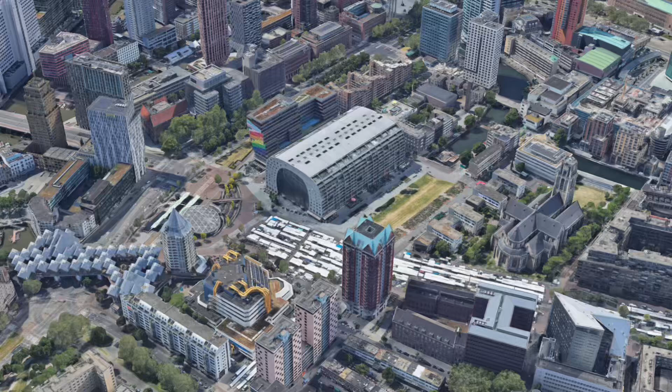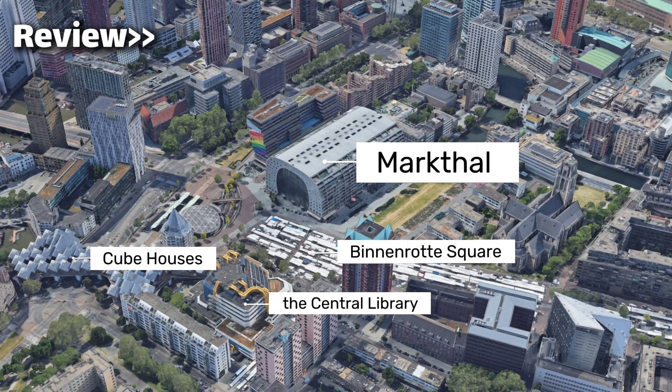The Markthal stands at the heart of Rotterdam, surrounded by major city landmarks such as the iconic Cube Houses, the Central Library, and Binnenrotte Square, and enjoys direct access to the city's transport network via the adjacent Blaak station.

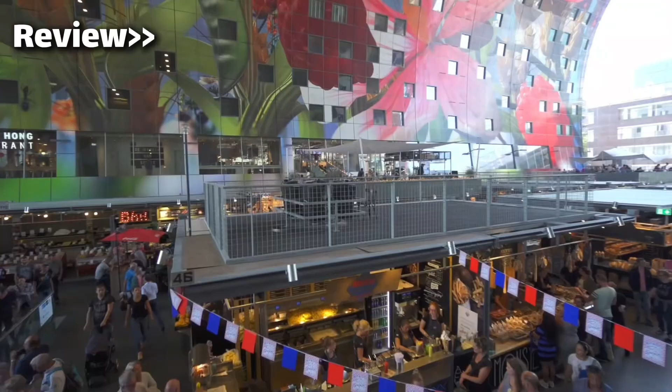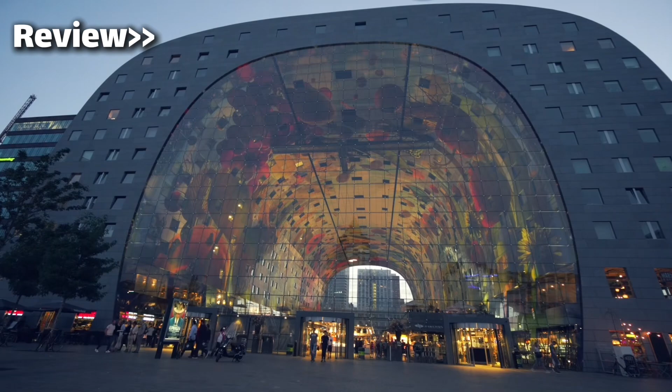As a pioneering model of urban multifunctionality, the Markthal uniquely binds a vibrant food market, diverse restaurants, retail spaces, and cultural venues with 228 apartments, including 24 luxurious penthouses, all housed beneath a dramatic horseshoe-shaped arch.

Conceived by MVRDV atop a historically layered site, the building vertically integrates its extensive commercial areas, cultural amenities, and residential units to create a lively, cohesive hub. 4 basement levels offer parking for 1,200 vehicles. The ground and first floors support over 100 food stalls and restaurants, and the soaring arch above houses apartments with

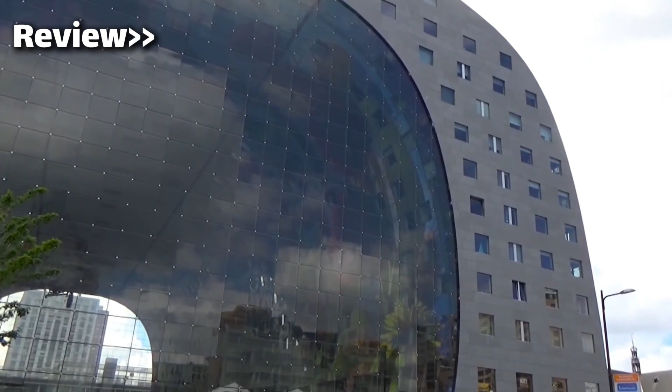striking city views. This intricate layering is made possible through cutting-edge structural innovation, notably the continuous concrete arch and record-setting cable-net glass facades, enabling natural light and panoramic connections across the diverse internal functions. Markthal is thus an exemplary case of vertical city living, where housing, commerce, leisure, and culture are interwoven within a

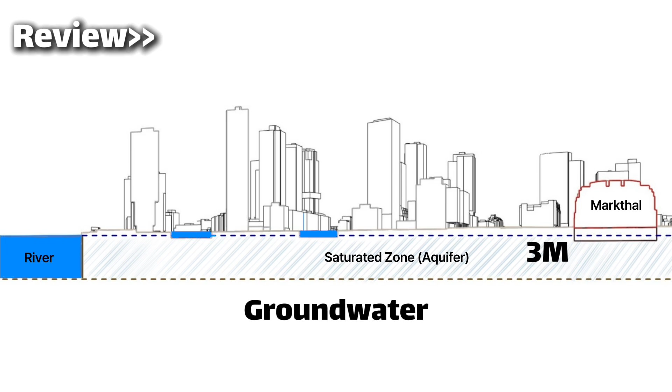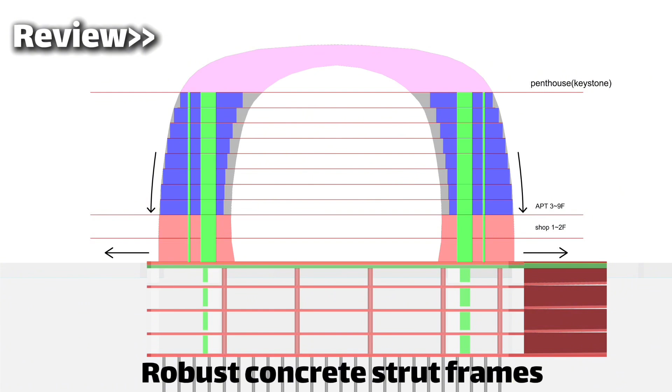single, dynamic structure. Built on historically reclaimed land with groundwater just 3 meters below the surface, the construction of the Markthal presented significant geotechnical challenges. Instead of relying on deep anchors, which would have been both risky and complex given the unstable subsoil and high groundwater, the project team employed robust concrete strut frames as internal bracing. These struts stabilized the excavation by resisting lateral earth pressures and maintaining the integrity of the construction pit.

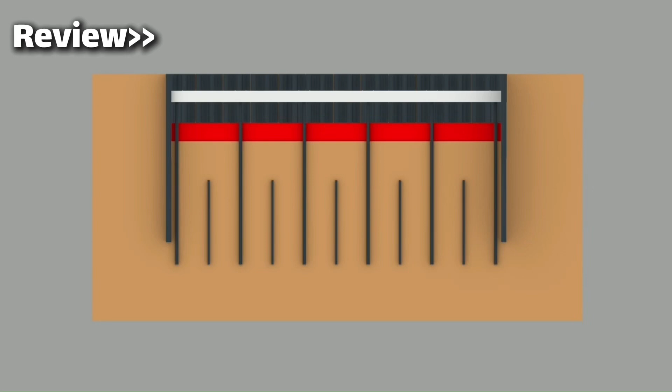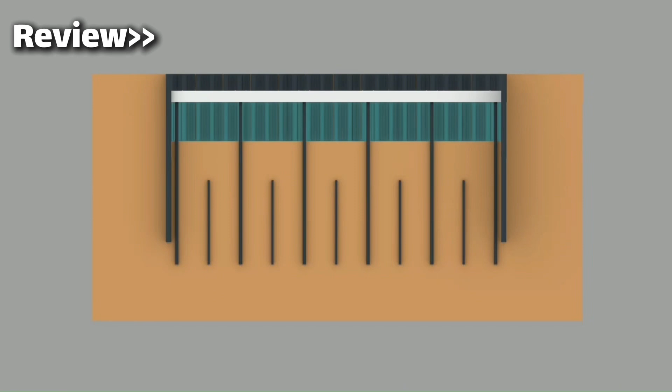To further counteract hydrostatic pressure and prevent potential hazards, the site was intentionally flooded. By filling the pit with water, engineers created inward hydraulic pressure that balanced the external forces exerted by the groundwater. After managing the groundwater pressure, the team constructed a massive 1.5 meter thick underwater concrete base slab. This slab provided a stable and watertight foundation upon which the rest of the structure could be safely built.

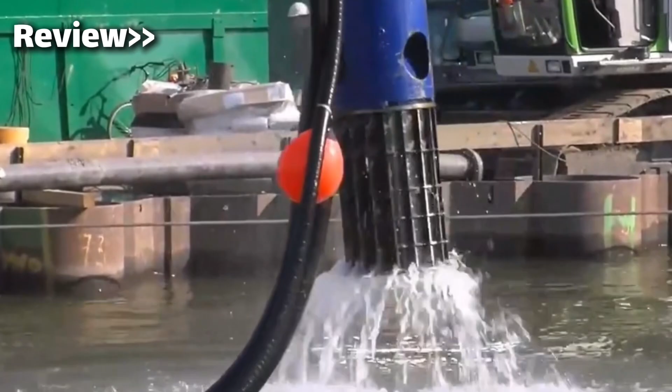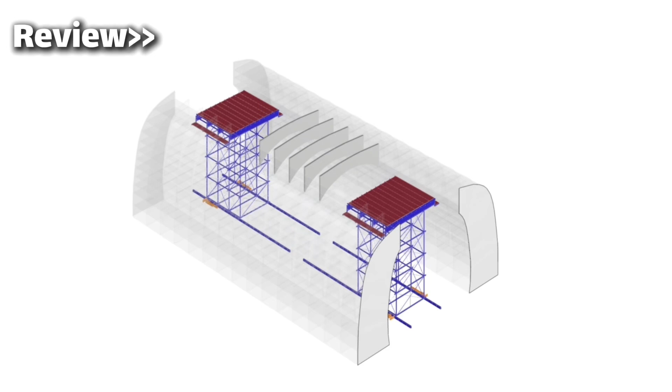After this foundation was secure, workers began the gradual process of dewatering the pit, at a rate of about 3 centimeters per hour. With the groundwork firmly established, we now move forward to explore the architectural and engineering feats that shape the Markthal's distinctive arch, particularly the construction of the soaring arch roof. This phase demanded the use of tunnel formwork, temporary mobile shuttering, and meticulous sequencing to accommodate the curving apartments and communal spaces embedded within the arch.

Enhancing the vast interior, the Horn of Plenty artwork animates the 11,000 square meter ceiling, exemplifying the seamless fusion of engineering precision and artistic ambition that defines the Markthal.

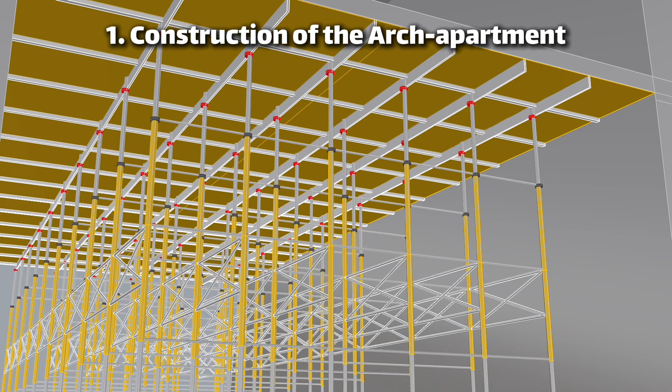The first and second floors of the Markthal were constructed using the traditional reinforced concrete method. Shoring props were used to support the wide column spans and temporarily carry the loads of the freshly poured concrete slabs. At this stage, cable frames were also installed in preparation for the glass facade. These frames provide both structural support for the future cable net facade and contribute to the building's overall stability.

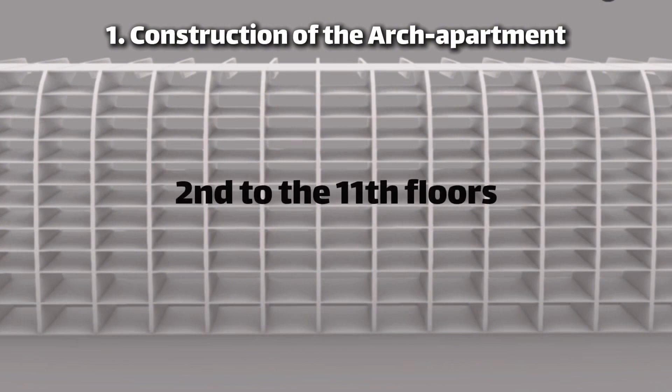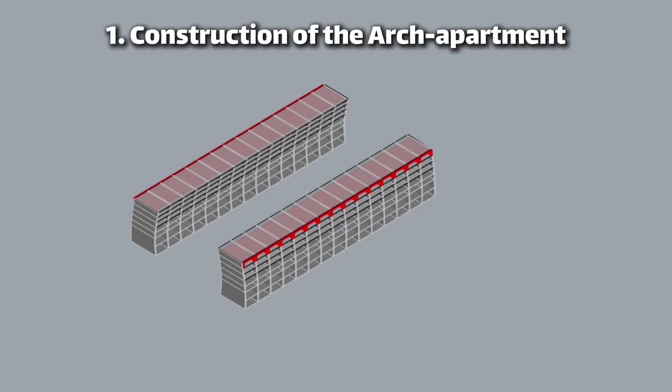From the 2nd to the 11th floors, the residential arches of the Markthal were built using the tunnel formwork method. Unlike conventional reinforced concrete construction, tunnel formwork enables the simultaneous casting of both walls and slabs. This method was ideal for the repetitive, arched residential units. The all-in-one process improves the uniformity and quality of construction while significantly increasing speed. Additionally, tunnel formwork yields high structural stiffness and reduces curing time compared to traditional methods.

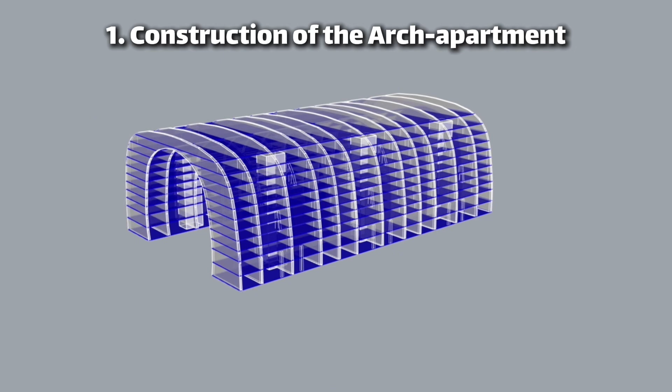Structural cores and tunnel formwork walls play a primary role in both vertical load bearing and lateral load resistance. The core structures and tunnel-formed walls collectively transfer gravitational loads to the foundation. The slabs, created with the tunnel formwork method, provide horizontal stiffness, enhancing the building's overall stability.

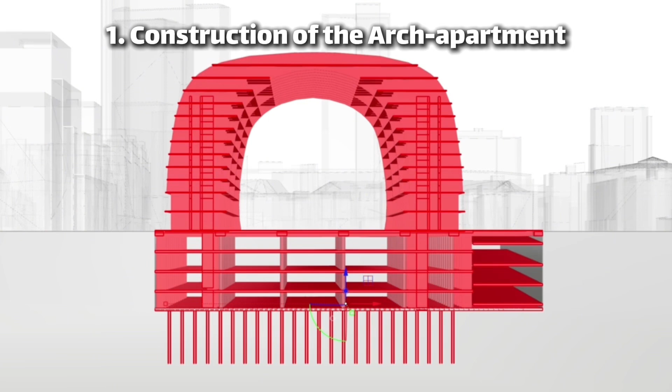In this system, the tunnel-shaped walls act similarly to shear walls, but with greater continuity, which means that the structure responds effectively to horizontal loads, such as wind and seismic forces, without the need for many additional, separate shear walls. The high rigidity and inherent torsional resistance of the tunnel formwork system allow the building to resist lateral forces efficiently and as a unified whole.

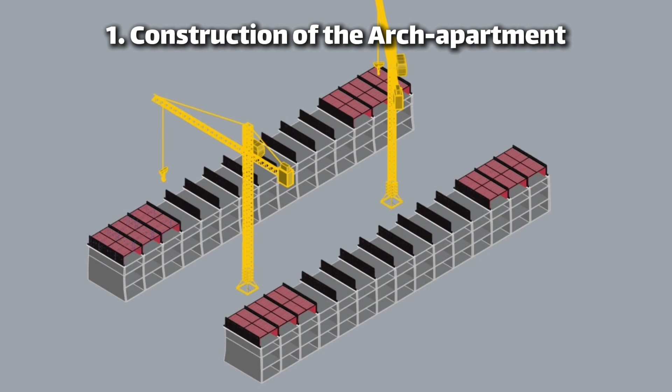The construction began with the establishment of precise baselines and foundation settings, employing advanced 3D modeling and laser surveying equipment to ensure meticulous positional accuracy along the arch's complex geometry. Tunnel formwork, composed of rigid, reusable metal molds, was installed at both ends of the arch, allowing for the simultaneous fabrication of 4 cells per day, 2 from each end.

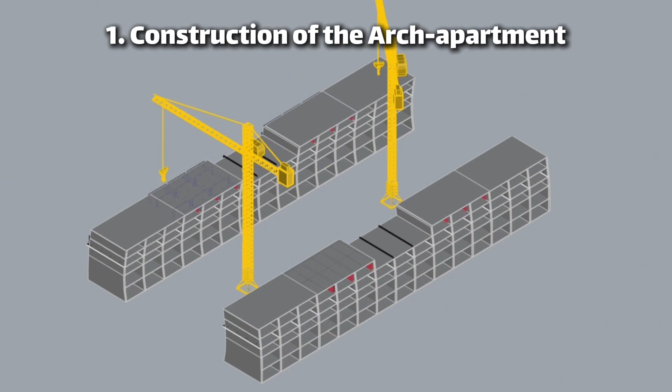The formwork itself was engineered to accommodate micro-adjustments, ensuring perfect alignment with the evolving curve of the arch. After site levels are ensured, the main vertical panels are first assembled on the ground near the working area. These include the form face and back structure. It is essential to ensure that the panels are square and properly braced to maintain alignment during installation.

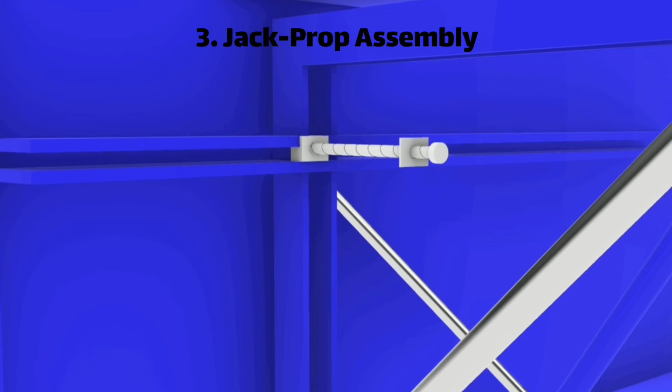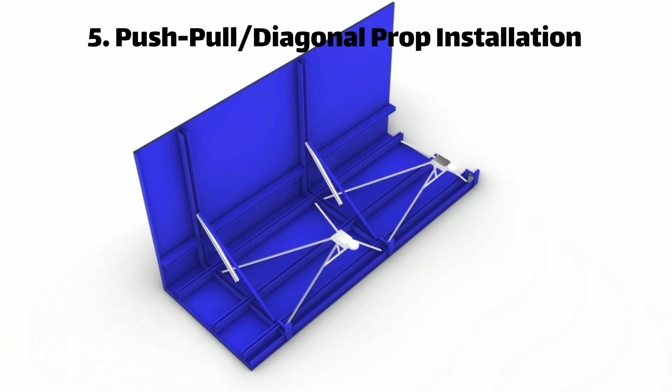Following this, jack props or hydraulic jacks are installed. These allow vertical and lateral adjustment of the panels and help precise positioning. Wheel supports are then assembled at the base. It is important the wheels are properly aligned and locking mechanisms should be fully functional. Push-pull props or alignment struts are installed to control the verticality of the panels during erection. These supports help adjust and maintain the formwork's plumb condition.

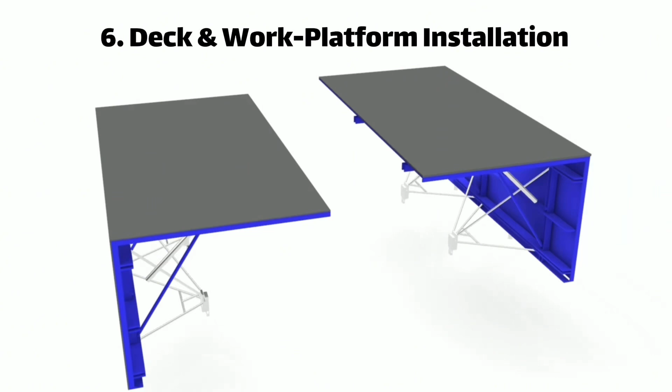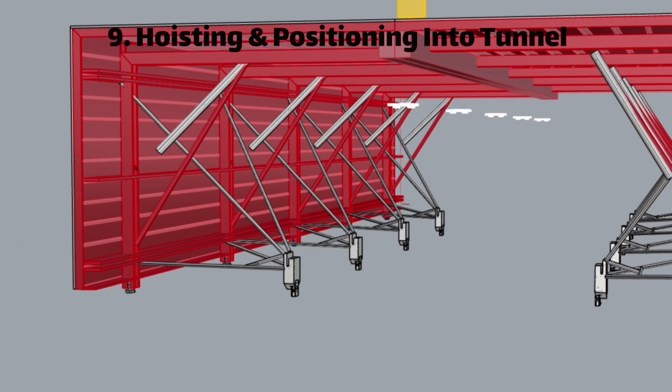Next, the deck panels are assembled. This forms the slab portion of the tunnel structure. Drill holes for the lifting beam at the right height. It is important to ensure that these holes are structurally sound and positioned according to design specifications. The lifting beam or spreader bar is assembled and attached. The rigging should be checked to confirm proper load distribution and safe lifting angles. Lift the carriage and gently roll or slide it into its starting bay.

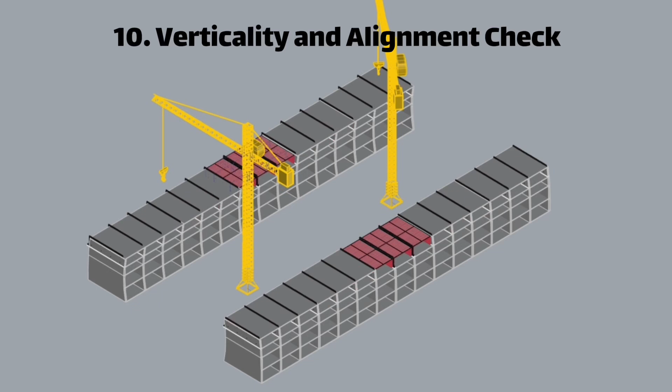Lower and lock wheels. Once the form panels are positioned and braced on site, check their verticality using spirit levels, lasers, or plumb bobs. Adjustments are made using the push-pull props to ensure precise alignment before concreting. Finally, connect 2 panel halves to form a complete tunnel form cell. This is done using tie rods.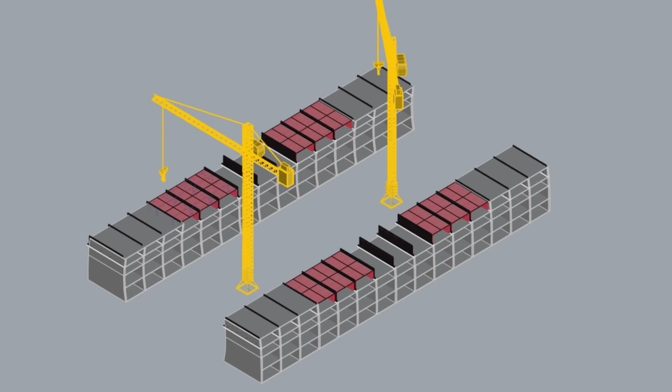2 tower cranes were utilized for positioning, removal, and repositioning of these heavy formworks, optimizing workflow and minimizing downtime between cycles. The initial layout is laser verified, and support platforms are set to predefined tolerances. Steel tunnel forms are moved into position using cranes, then micro-adjusted to follow the arch's incremental curve.

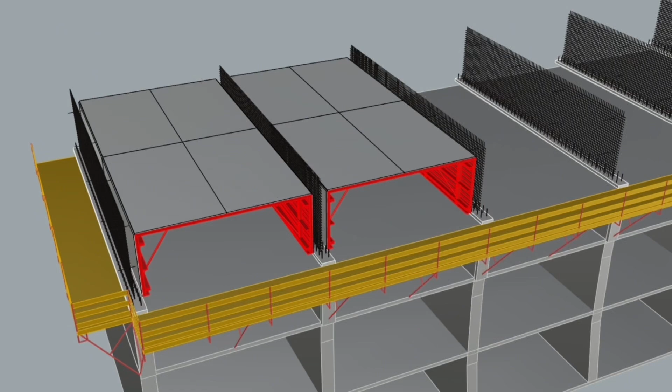High-strength rebar grids are carefully installed within the formwork for both vertical walls and horizontal slabs, ensuring fabric continuity at construction joints through tightly controlled overlaps. Concrete is cast into the paired wall and slab forms in a single operation, with internal vibrators preventing segregation and voids. Winter conditions in the Netherlands necessitated heated coverings and real-time monitoring via maturity sensors to manage curing rates and prevent weather-related delays.

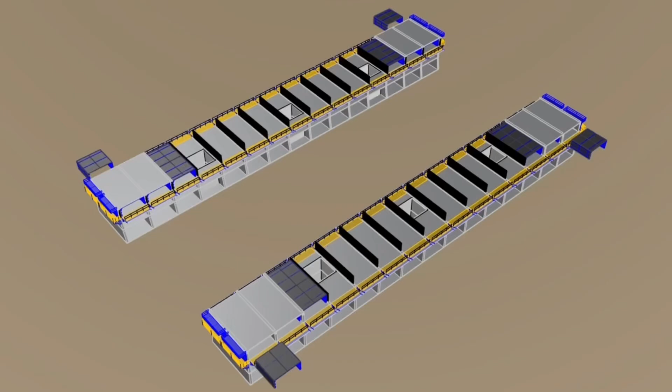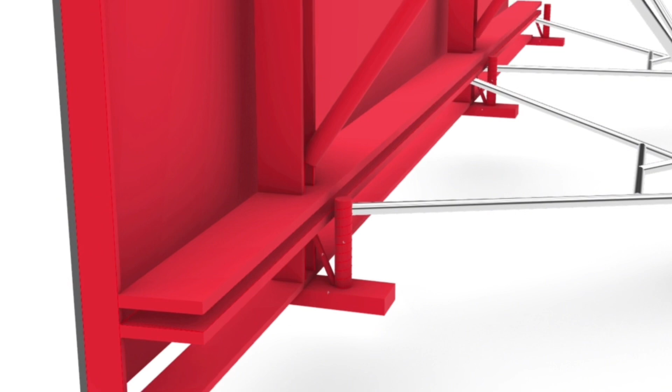After the concrete has cured to the required strength, the tie rods are released in preparation for dismantling the formwork. The formwork is carefully dismantled and detached from the hardened concrete structure. The driving wheels or rollers are secured to ensure proper movement and stability during repositioning. Jack props are installed and adjusted to support the formwork vertically and laterally, ensuring proper alignment. Tie rods are inserted to lock the 2 form halves together, maintaining structural integrity during concrete placement.

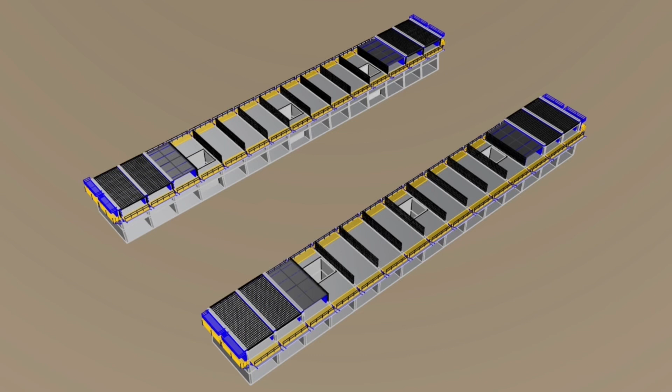Reinforcement bars for the slab section are placed and tied in accordance with the structural design. The rebar is cleaned to remove any dirt, rust, or oil, ensuring optimal bonding with the concrete. After the concrete has cured to the required strength, the tie rods are released in preparation for dismantling the formwork. The formwork is carefully dismantled and detached from the hardened concrete structure.

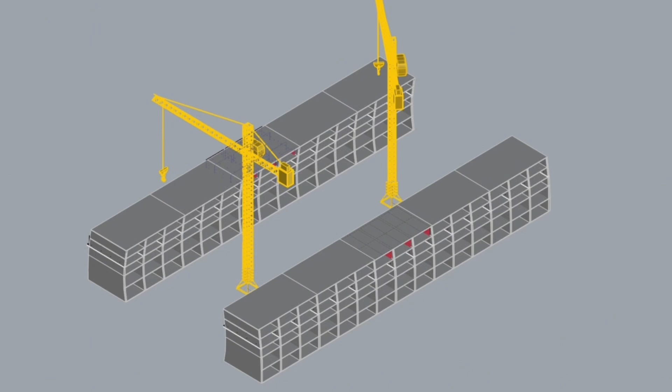Immediately after form removal, construction joints, where fresh and existing concrete meet, are treated with grouting and additional rebar to ensure both structural continuity and water tightness. Waterproofing applications are conducted as needed to safeguard long-term durability. The tunnel formwork is moved to the next bay or section and reinstalled for the following concrete pour.

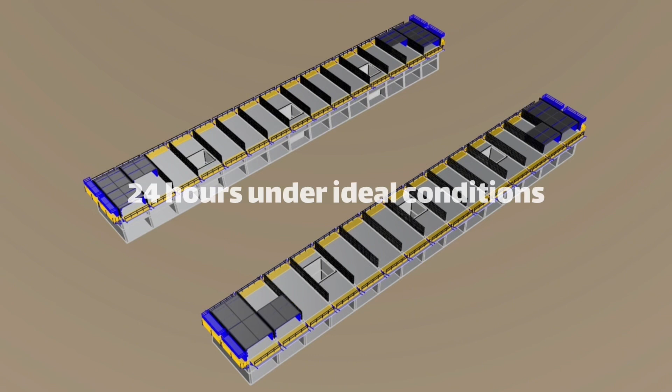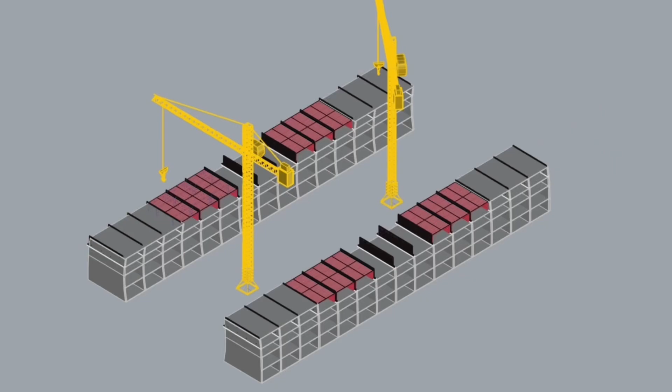Each cycle, consisting of formwork installation, reinforcement, concrete pouring, and form removal, can be completed in less than 24 hours under ideal conditions, with up to 4 cells built every day, 2 at each end. This continuous pace progressively shapes the arch from both ends toward the center. After each pour, joints at the interfaces between completed and newly cast sections are treated with grouting and reinforced to prevent cracking and ensure water tightness.

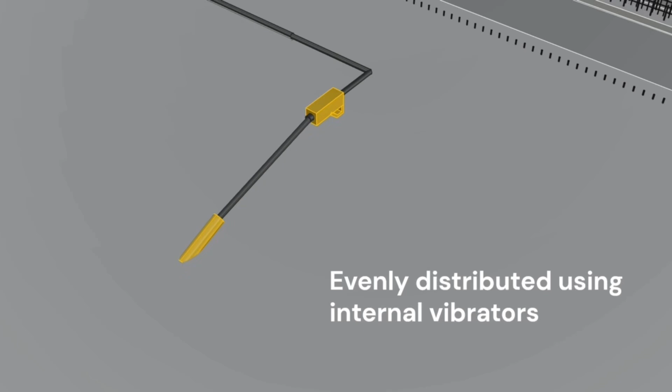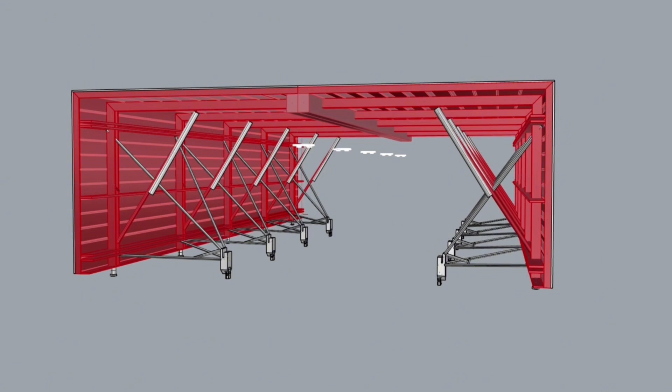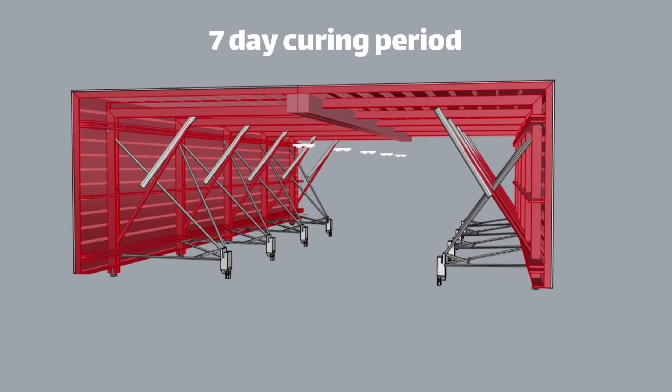A fundamental challenge was that freshly cast concrete lacks the strength to support construction loads immediately after pouring. To address this, system props and shoring structures, modular vertical supports, were employed beneath the formwork and new slabs. These temporary supports remained in place until the concrete attained at least 70% of its target design strength, typically after a 7-day curing period, as verified by maturity assessments and on-site inspections. Only once sufficient strength was confirmed could the supports be safely removed and the construction process advanced upward or inward along the arch.

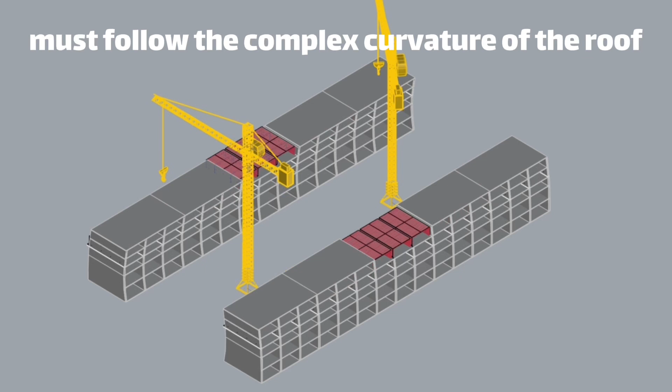A key challenge arises as the building's arch progresses upward. The tunnel formwork must follow the complex curvature of the roof. The forms are fine-tuned and aligned precisely to the arch's design, a process that is carefully monitored throughout construction.

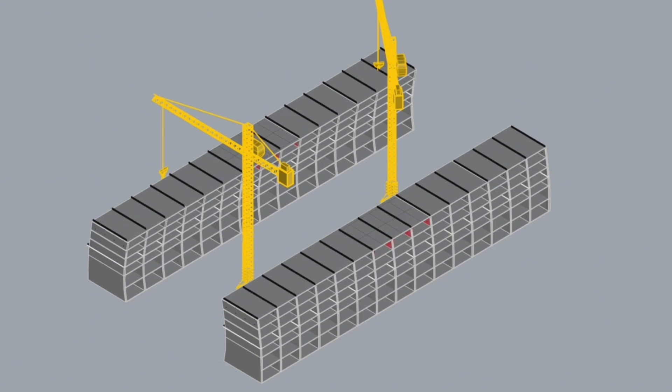Furthermore, the unfinished concrete in newly cast cells cannot bear its own weight until sufficient curing. Temporary supports, system props, and shoring are left in place to maintain stability, with removal only allowed once the concrete achieves at least 70% of its design strength.

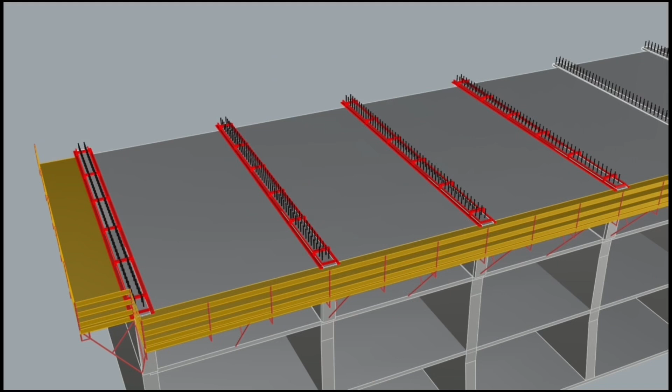Maintaining the precise curvature of the market hall's arch throughout construction was both a structural necessity and an architectural imperative. From the earliest stages, stringent control over baseline and foundation layout was enforced to prevent small deviations that could amplify as the structure rose. As construction progressed upward, the tunnel formwork modules had to be carefully repositioned and finely calibrated at each step to follow the intended arch geometry.

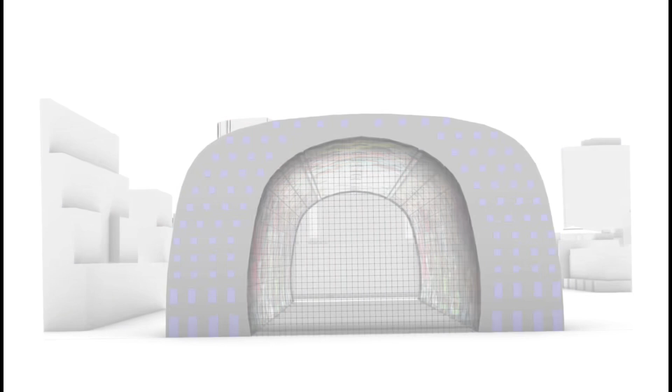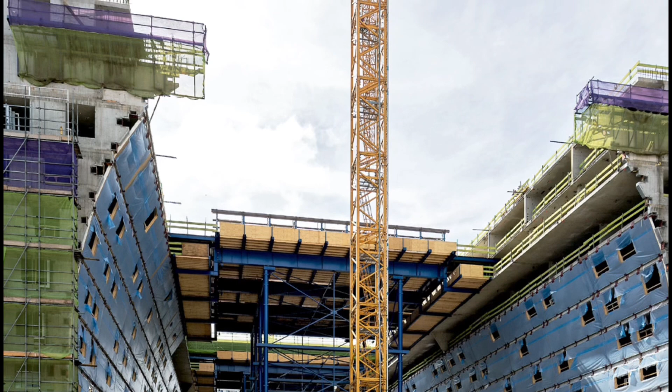This level of accuracy was achieved through the coordinated use of advanced 3D modeling in the planning phase, establishing the ideal curvature and alignment, and continuous on-site laser surveying, which enabled real-time monitoring and adjustment during formwork installation, concrete placement, and post-pour assessments. Iterative feedback between modeling and surveying ensured that every new segment precisely matched the design, safeguarding the integrity of the arch and minimizing the risk of cumulative misalignment.

As the construction of the arch progresses upward, the upper tunnel formwork sections float above areas without direct support from below. To address the resulting vertical and horizontal loads, a combination of steel pipe trusses and cable struts is employed as temporary shoring systems. These elements are anchored to lower, already hardened structural elements and steel platforms.

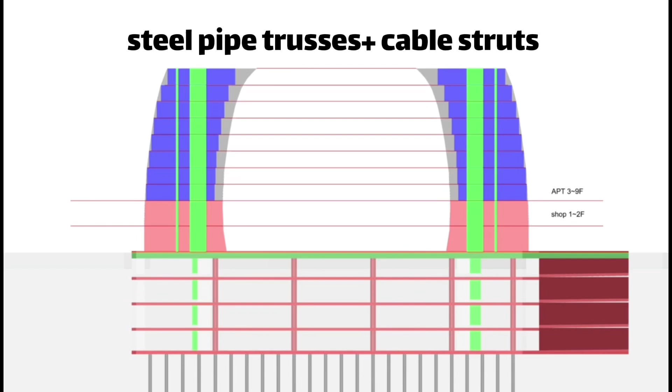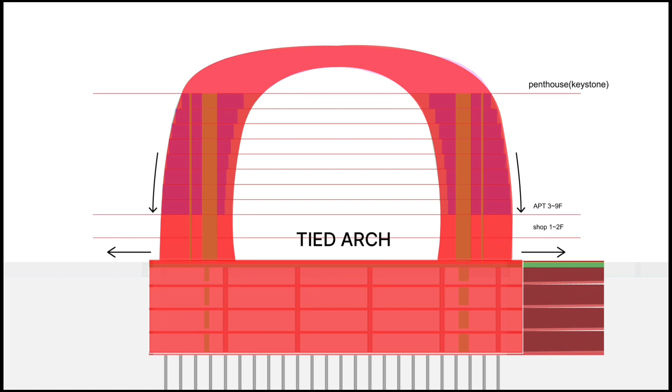The market hall's arch is erected symmetrically from both sides towards the center line. By constructing both sides of the arch simultaneously and in a balanced fashion, the loads and moments induced by the arch's shape and gravity are evenly distributed. This reduces asymmetric forces that could otherwise cause tilting, twisting, or buckling of the partially complete arch, even before the central keystone is installed.

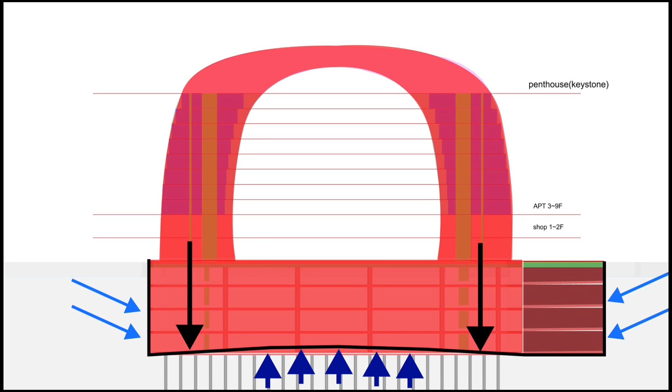Only after both sides are equally advanced and the overall arch stability is assured is the central, final cell constructed, closing the arch and allowing for the structure to act as a continuous compressive system. This approach stabilized the formwork and the arch.

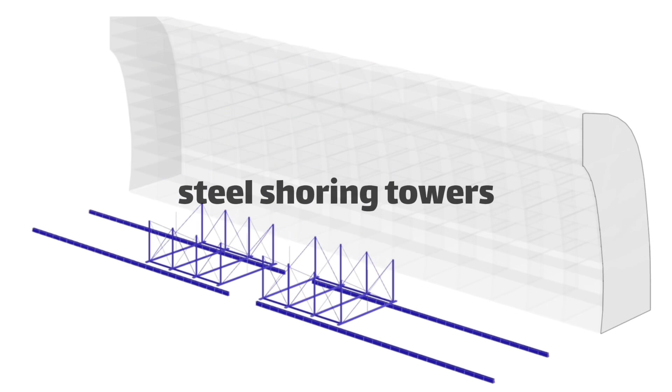Under the projected keystone location, heavy-duty adjustable steel shoring towers were erected at the lower side. Mounted on rails and equipped with hydraulic bases, these towers provided precise height and leveling control while allowing controlled redistribution of loads during pouring and curing. The hydraulic system enabled real-time adjustments to counter any differential movements and to maintain strict geometric alignment.

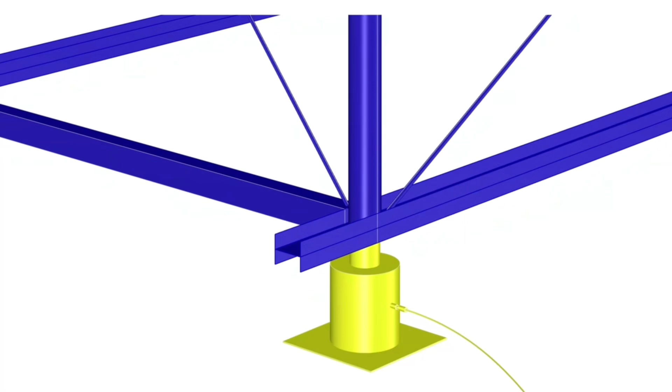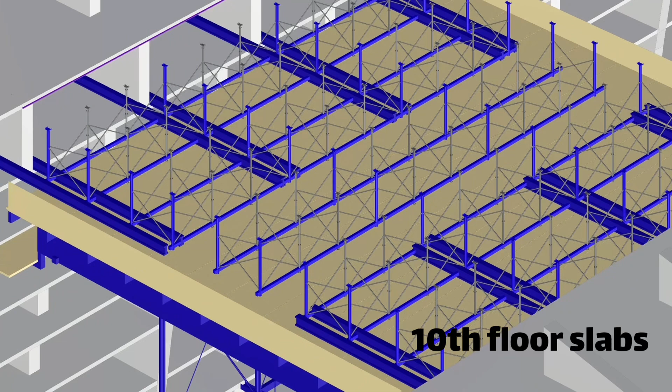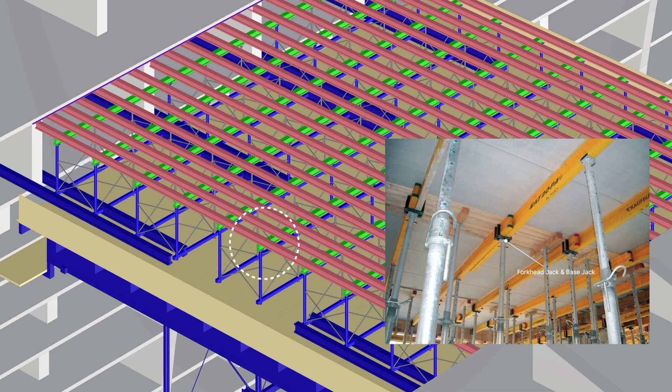Spanning the void between the two arch halves, a custom-built steel truss gantry was assembled atop the completed 10th floor slabs. This large span structure supported the formwork for the keystone, as well as the substantial loads of wet concrete and reinforcement during casting. The gantry featured fine leveling mechanisms, including screw jacks and hydraulic leveling plates, allowing for millimeter scale alignment and controlled deflection management during the pour. The gantry itself was securely anchored to the stable sections of the arch, ensuring reliable load paths throughout the process.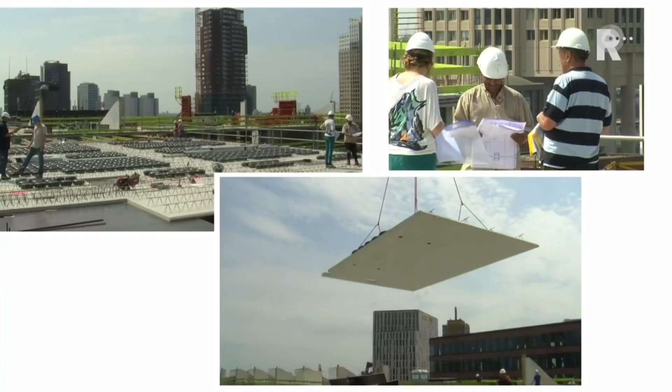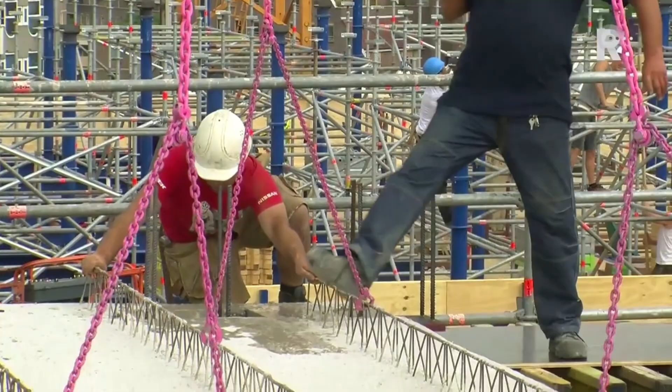Achieving equilibrium before pouring was critical for the arch's structural integrity. Surveying equipment continuously monitored displacements with sub-millimeter precision, while hydraulic jacks on the shoring towers and truss gantry enabled micro-adjustments. Only after both arch halves were confirmed to be perfectly aligned and level was the keystone formwork closed and prepared for concrete placement.

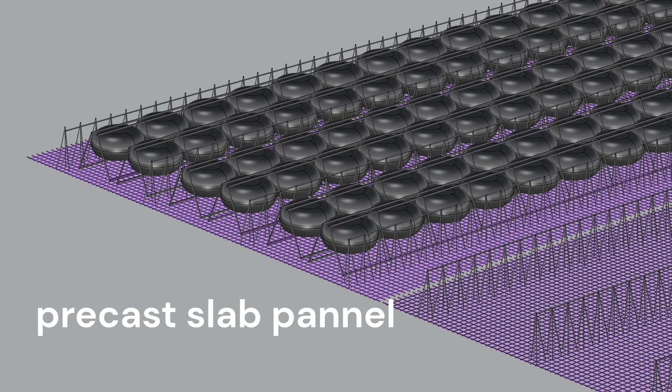The keystone, a monolithic slab with two integrated 400 millimeter thick wall beams, was poured using a combination of in-situ concrete and prefabricated elements. Concrete vibrators ensured proper compaction, while particular attention was given to floor finish quality and the planning of surface penetrations to prevent stress concentrations within this critical element.

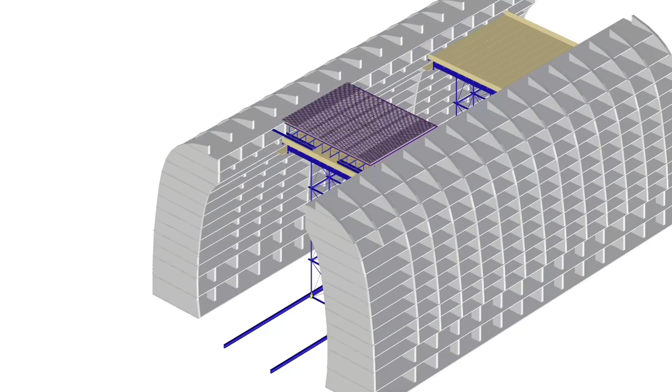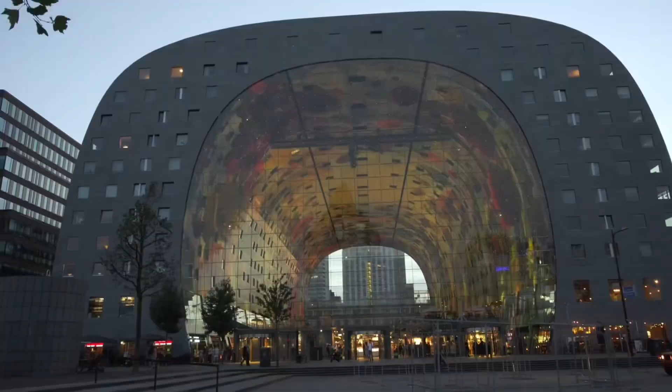Once the concrete cured to its specified strength, the keystone locked the two sides of the arch into a continuous, self-supporting structure. Temporary supports, including steel pipe trusses, cable struts, and shoring towers, were then removed in carefully staged sequences. Load transfer was meticulously managed during this process to preserve equilibrium, with each support being released only once surveying confirmed safe redistribution of forces through the arch's permanent compressive load path.

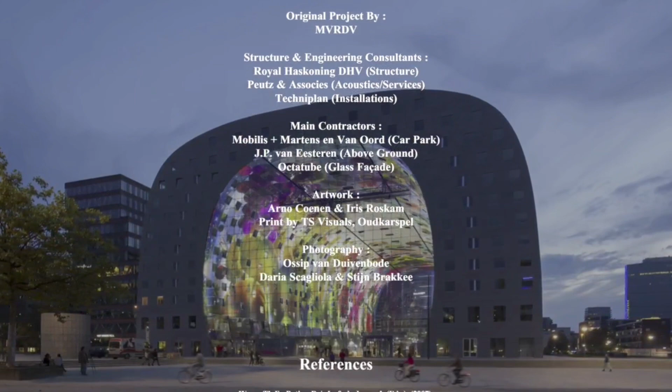In summary, the successful realization of the Market Hall's upper arch relied on a sophisticated orchestration of temporary supports, balanced construction sequencing, precision surveying, and carefully timed keystone closure.